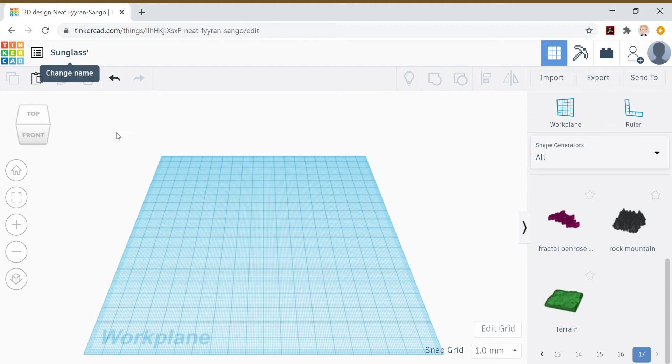Here I've already got my name changed and now we're going to make it. So if we go into basic shapes, we need a cylinder.

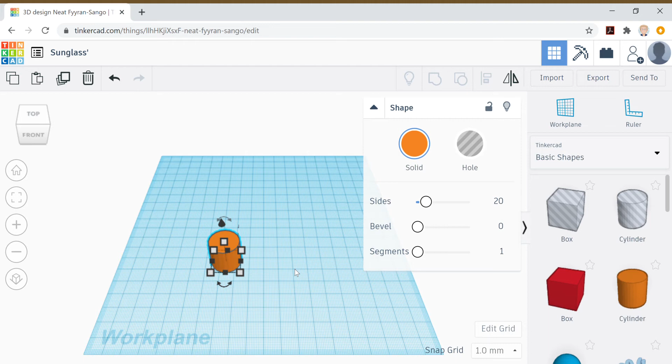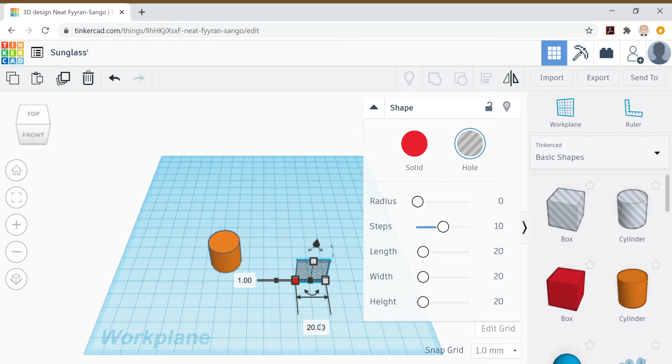Now I'm making these sort of cool looking glasses. You can make whatever type, but this is just at the moment what we're gonna do. So now I'm going to make my square thin and turn it into a hole. I'm also going to extend it to 30.

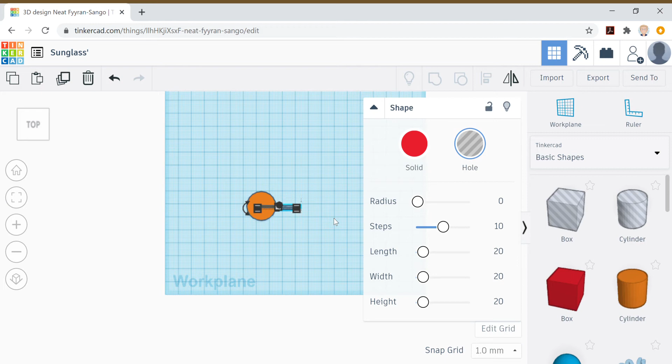So if I go and click on top view, if you press shift and right click, then you can easily see what's going on. Now I'm using my arrow keys as an easier way. You don't have to do the same thing, but you can.

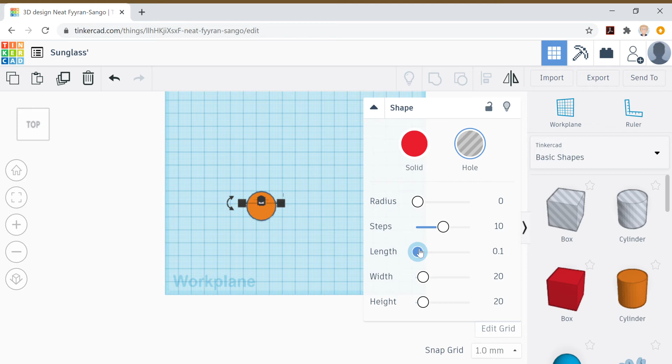Okay, so now that I have this, I'm going to try to stretch it out so it's length. Oh, no, not what we wanted. Okay. I've just Control Z'd everything. Okay, so we've got our little square now that we know how much that we want.

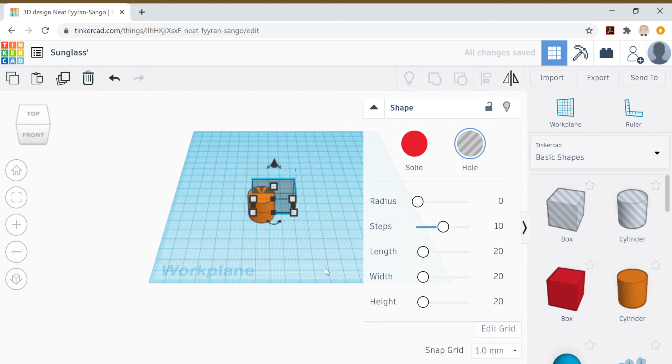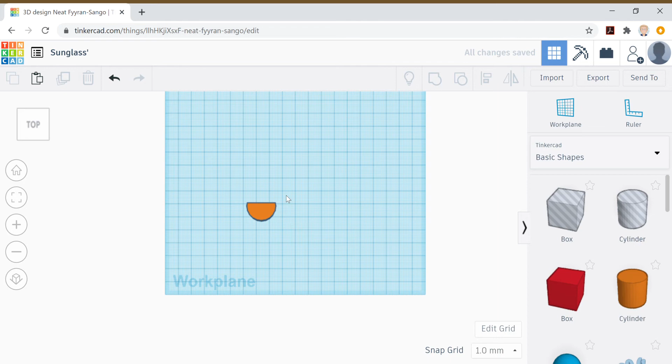Okay, so if I go right click, then group, this is how you cut a hole. If you group with a hole shape, then it will cut that shape into whatever size that you want. Now I need to duplicate, and out comes my second one.

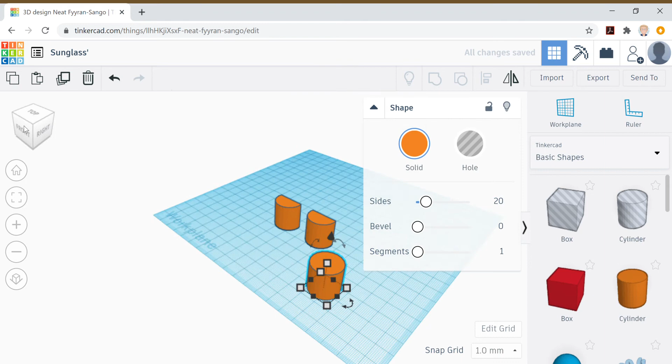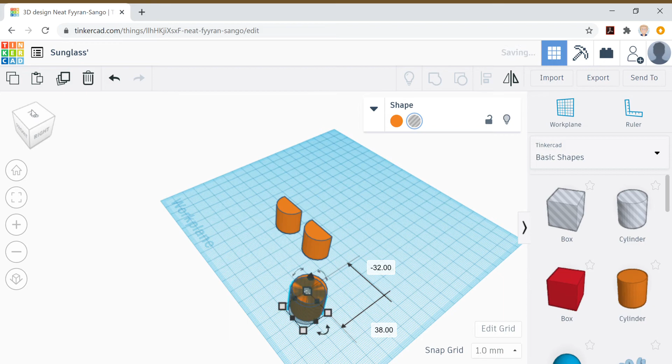Now I'm going to get another cylinder. You can just click that arrow to shorten it if you think that it's getting into the way. And then I'm going to get another cylinder, but I'm going to change it into a hole. And from the top again, and shift and move.

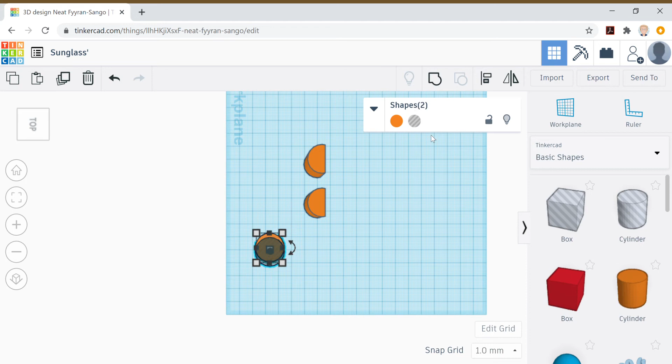Okay, now I've got my rim. I can group. There we go. That's going to be my nose piece.

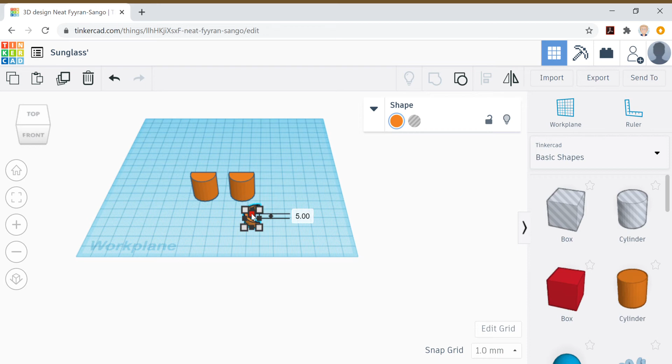Now we just go into the side. You get the top one, shrink it down to about 5, I think that would be the best. And then you hover over here and slide it to 90 degrees.

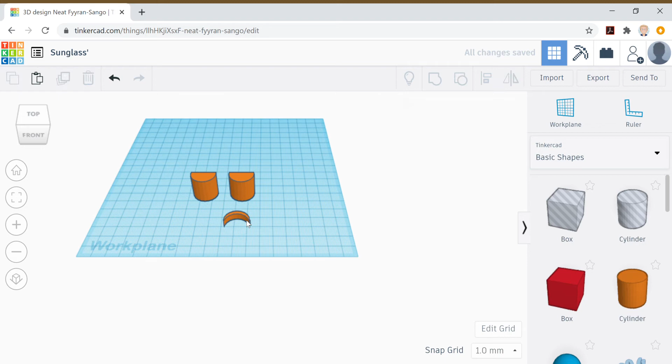There we go. Now I've got our nose piece. We should also do the same thing to the sunglasses. Shrink it to about maybe 7. There. Oh, nuts. Okay. Oh, 7. There we go.

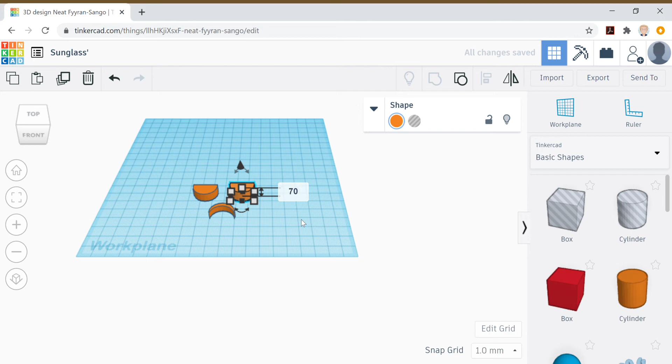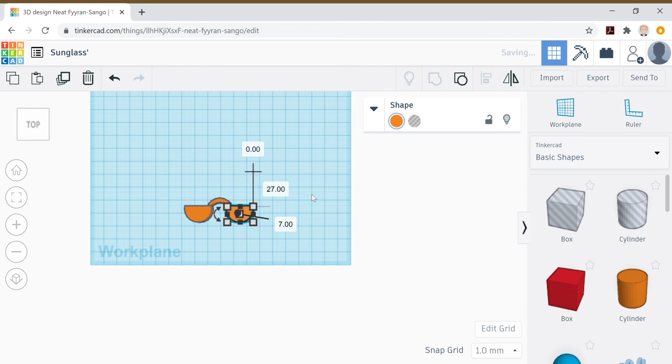Now at the moment, if I just go up, looks like a sad face. But if I go over here, there, I've got some little sunglasses.

But before I do anything else, I'm going to duplicate one more, move that to the side, because we'll need it for later. Okay, now I'm going to group this and change its color to black.

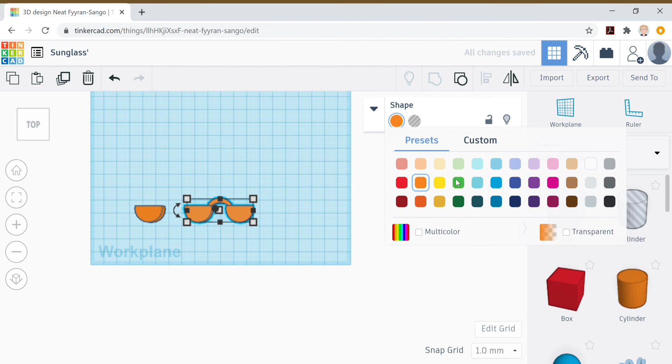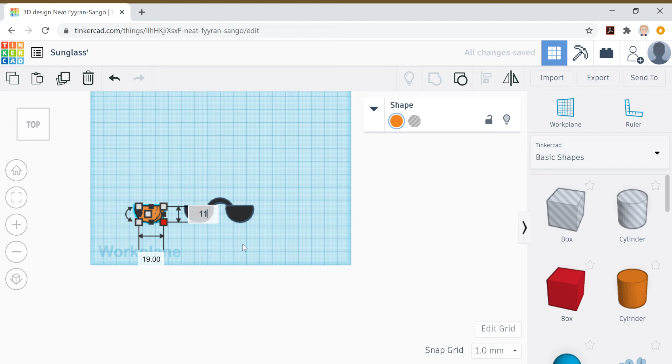Okay, now our sunglasses are coming together. I'm now going to make the transparent part. So if it's 20, I'm going to shrink it down to 19. Then if it's 12, I'm going to shrink it down to 11. I don't have to worry about the height.

So, yeah, maybe I should shrink it down a little bit. Oh, I'm raising it. Might have to do Control Z. Okay, there.

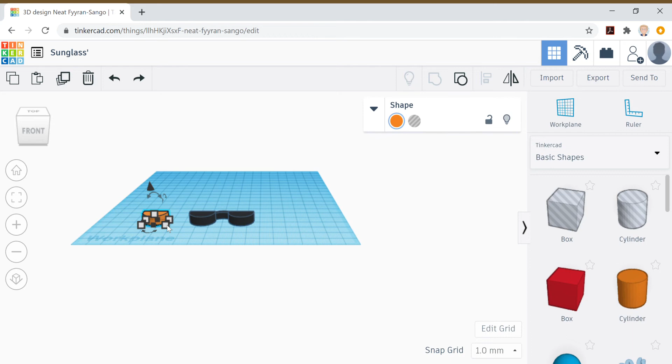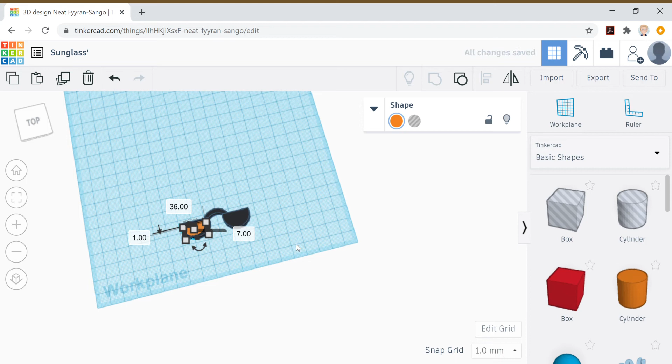We might have to change it just a little bit. Maybe go to 18 and 10. Okay, now I'm just going to leave it there, so then I can see. Okay, that looks alright.

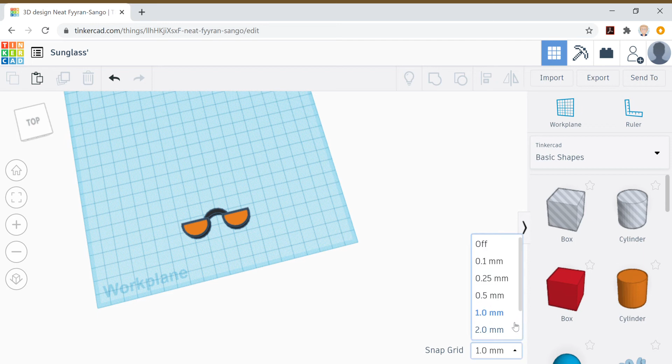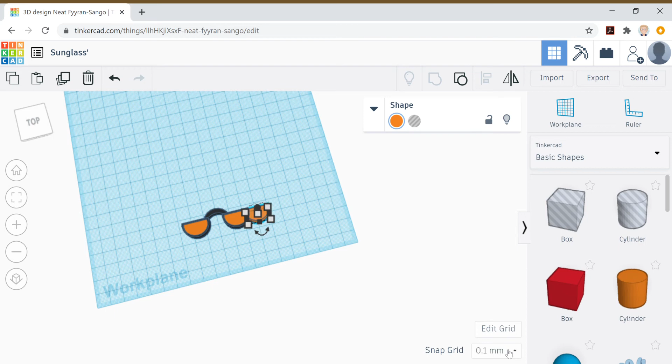If I just get the same one and duplicate it. Ooh. Now, I can make this easier or snap the grid into smaller pieces. I can make it 0.1 millimeter. So then when I move, it will make it very, very, well, yeah, hard to move. I'm going to keep them all into the same room, and as you can see, it's moving quite slowly because I snapped its grid into 0.1 millimeter.

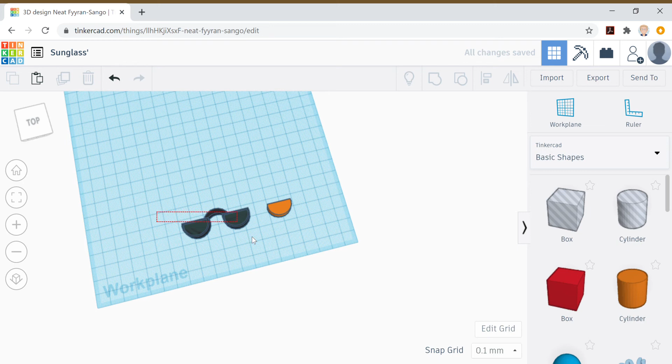I need to click on the orange, change those to holes, group, now we've got our holes. At the moment, they look quite weird. But we're getting there.

Okay, now if I click this, I'm going to transparent it and change it to a dark grey for mine.

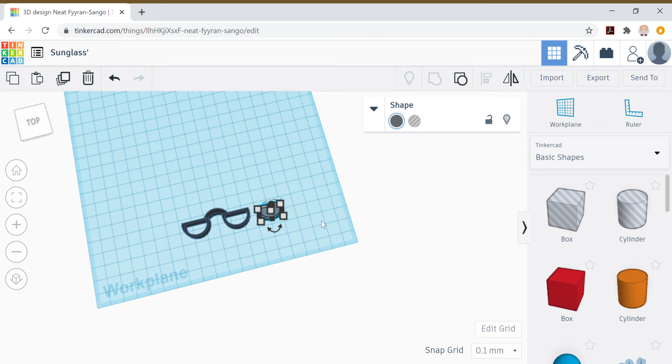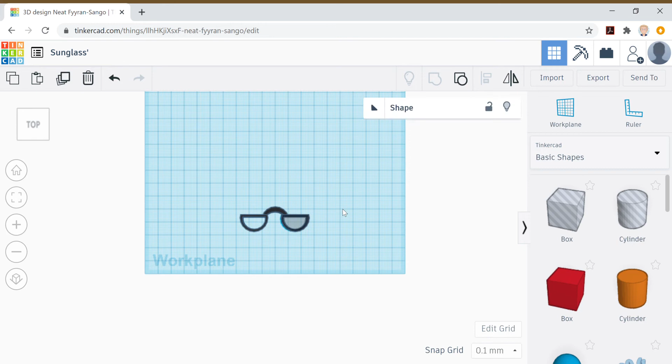Now that's moved in. Let's just check it's all good. Not all good at the moment. Move it to the side just a little bit. Nope. Two more.

Now this might take a long time. Oh, there we go, now we have it. I'm going to re-snap my grid to here.

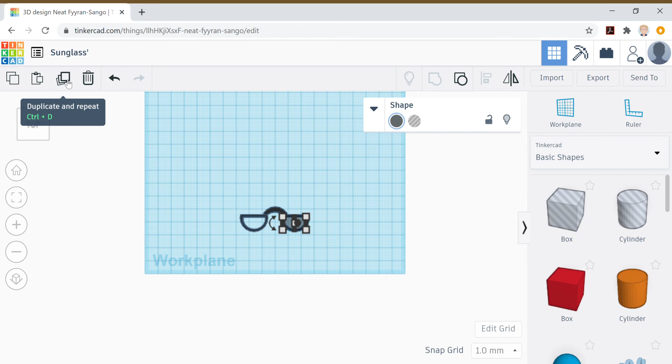Then I'm going to click on that, duplicate it, and there. Oh, nope. I might need to snap it back. Just move it a tiny more there, half.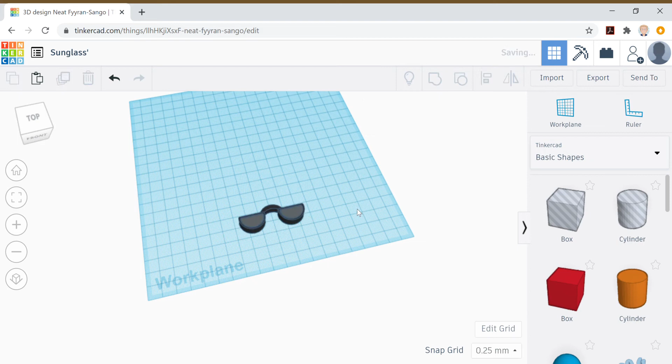Okay, so now we have our sunglasses, or our actual glasses part. I'm going to group them all. Now they'll turn all transparent, but not to worry, multicolor will come in handy.

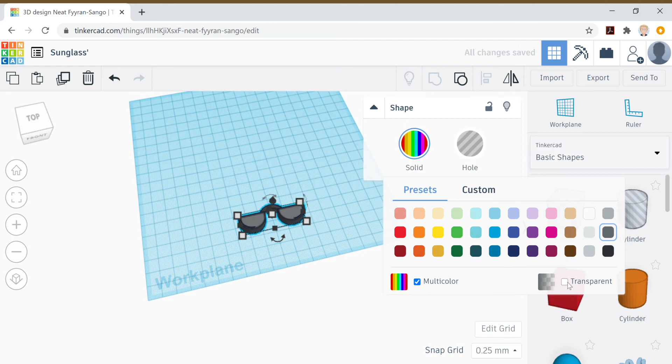Okay, there we go. Now I don't know why the multicolor didn't work for transparent, but yeah, okay, so now we'll move on to the next part.

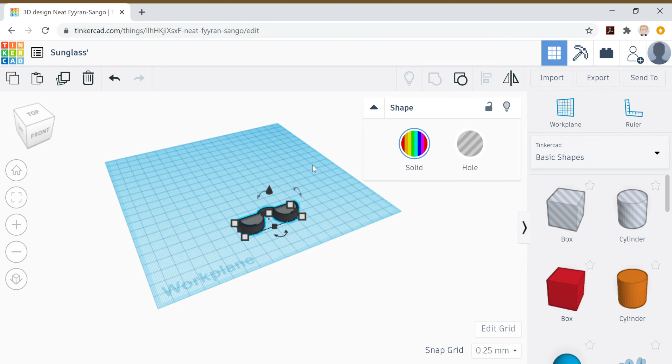We have now, hover over here and change it to 90. Okay, yep. Now I might rise it as well, so then it goes to 0.

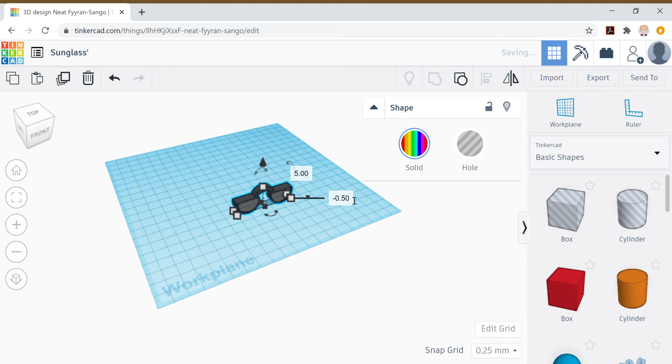There. We might also shrink it a bit down as well. Shrinking and done.

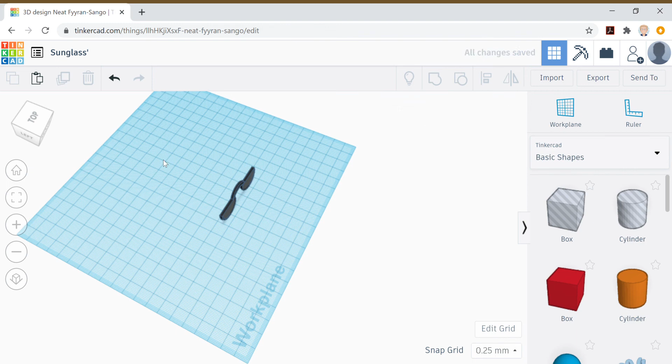Okay, now we can highlight it again, ungroup it, and our shades will almost be done, or our sunglasses.

Okay, so now what do you think we should do? Pause the video and think about it, and now I'll tell you the answer.

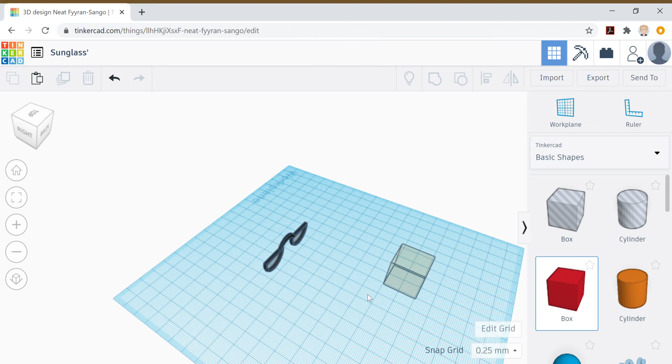We're going to make the earpieces. So these bits might be a bit hard, but we will just do, because we're beginners, we're going to make it nice and easy.

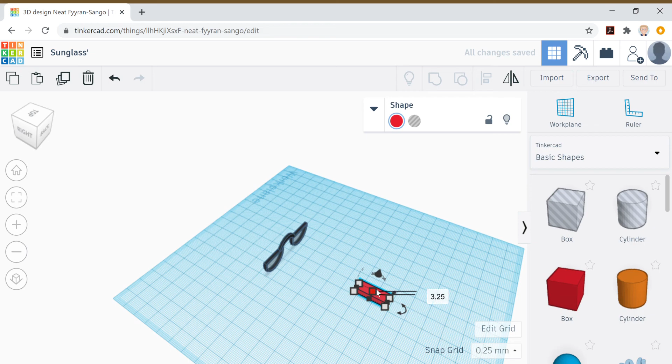Just start off with that thin line. Get to that little black square, extend it to whatever length you want. I'm going to extend it to 40.

Yep. And then I'm going to get my cylinder and shrink it down to about 5.

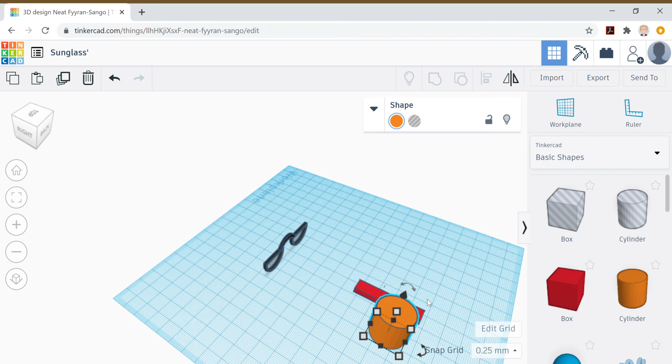Here, 5, and then here, 5. Also, something that a teacher taught me when I was learning about Tinkercad is when you're using a circle, it won't be the exact same size.

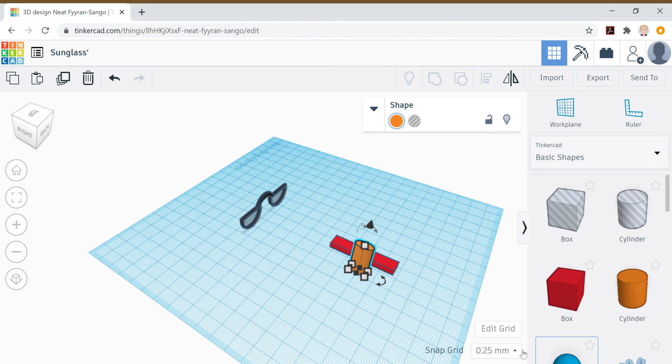So Tinkercad might look like it's a full circle. So if I had it like this, then I changed it just by 25, and maybe extended this part to 25 as well.

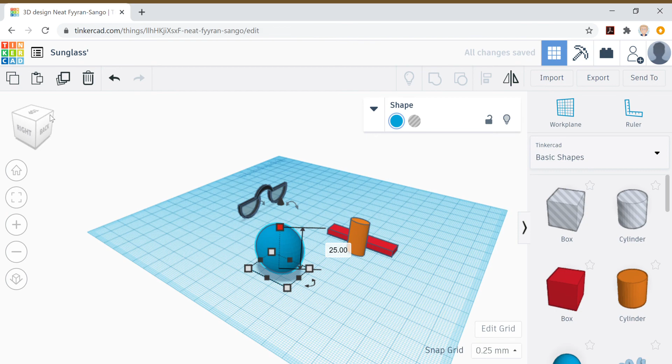May look a bit like a circle, but that's just the Tinkercad program. It won't look exactly like that. It'll look quite different.

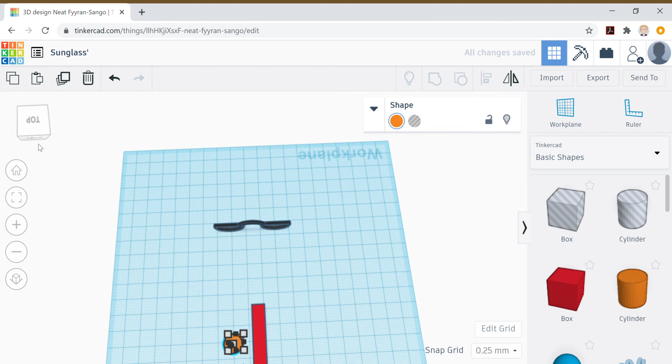So if I change this back to 10, and then we go up, we can move our cylinder close.

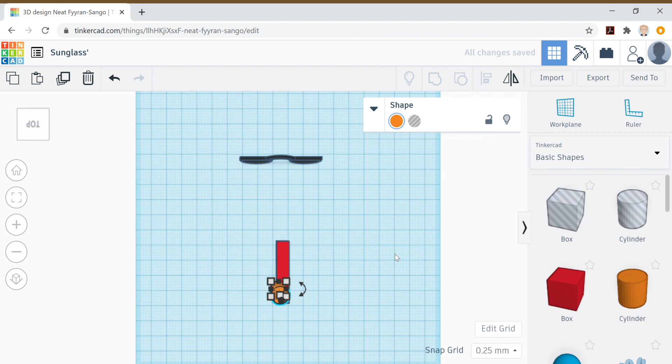And then change it into a hole, highlight it, group it. Now we've got our little earpiece.

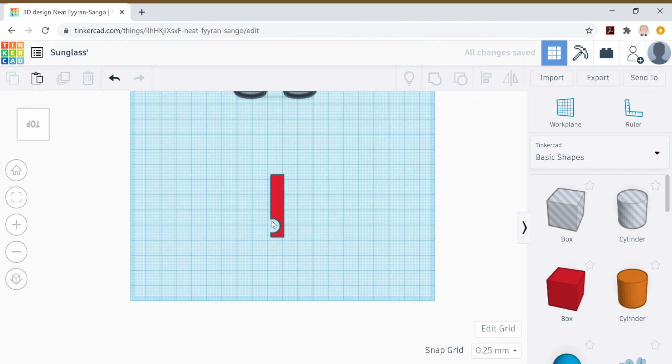Now we could do a longer, like a better one, but because we are beginners and I'm just teaching you how to start it at the moment, we won't try to go too hard.

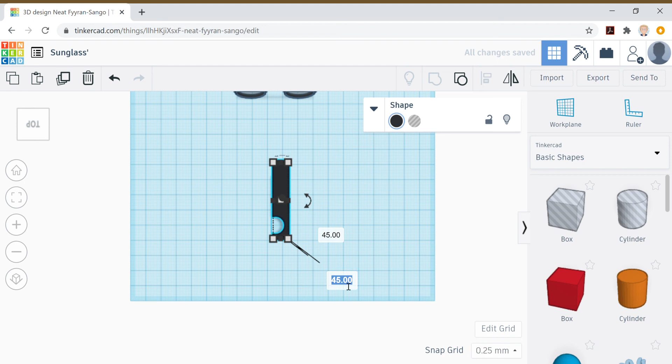Now let's go to here and flip that over to 90.

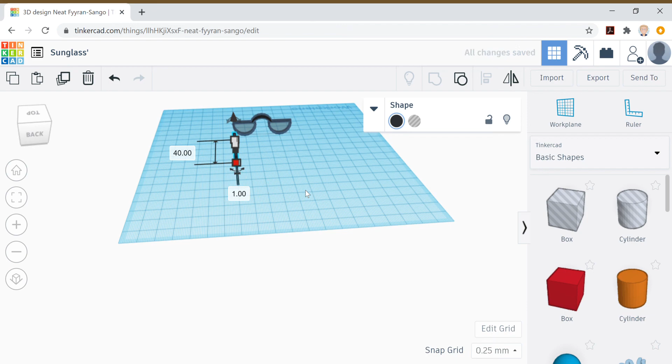Also change this to 1, the thinnest you can get, so then it'll come up with the best possible mark.

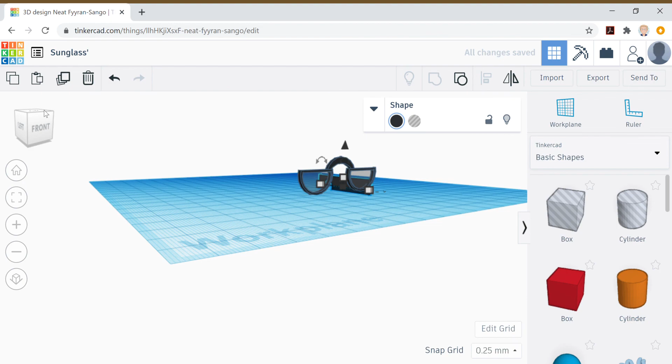Now rise. And, oh, okay, I'm going to change this just to be 4. Maybe 4.5. Yeah, that's perfect.

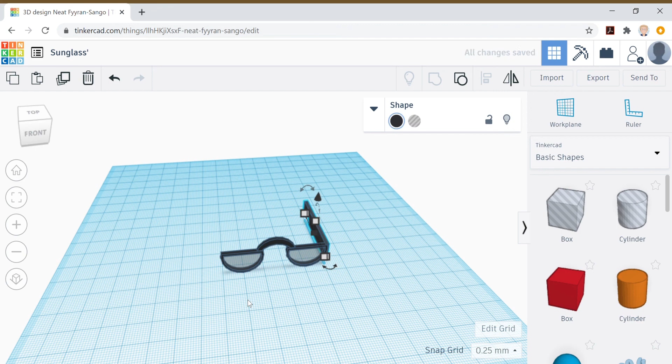Now that that's in, I can duplicate it. And I don't have to worry about its height now. I can just slide it across all the way to here.

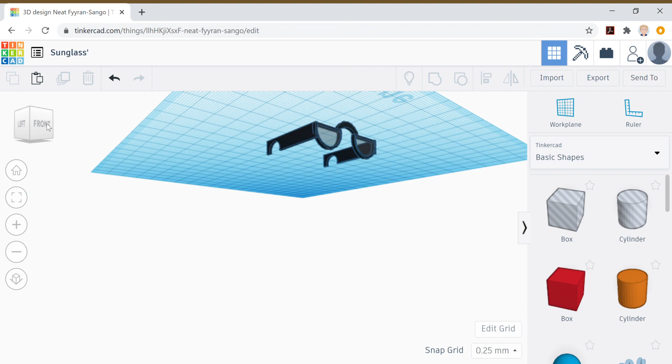And there you have it. We have our little sunglasses. If you have explored Tinkercad, you might see there's actually sunglasses in there, not in the basic shapes, but in general. But because, well, yeah, it won't really teach you that much, we have created our own.

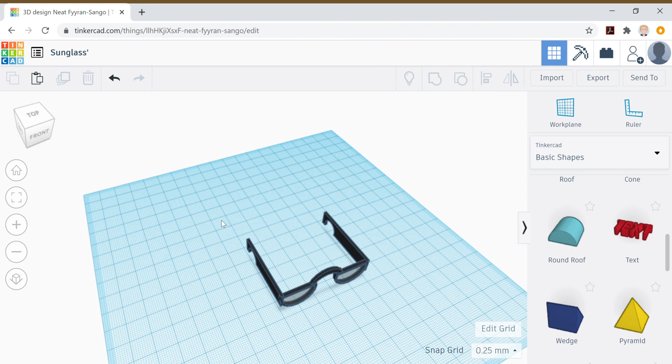So, because it's good, I'm going to highlight it, put it into my shape collection, and make sure maybe I could use it another time.